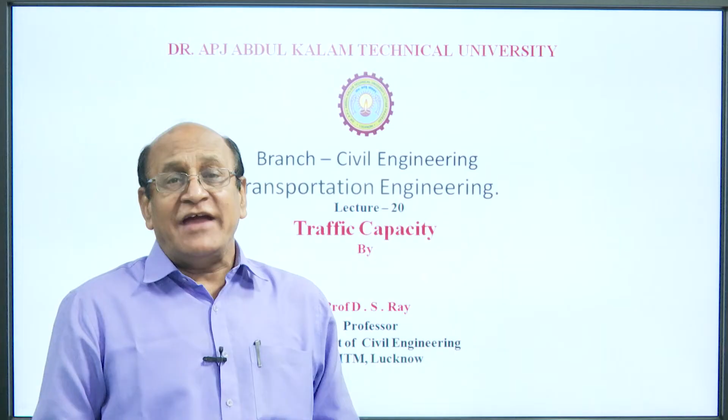Today, we will discuss the chapter of traffic engineering, that is traffic capacity. Before going to start traffic capacity, a few words have been left in previous lectures, so I will cover them in just 1 or 2 minutes.

Today's contents are accident and records, collision diagram, accident investigation and study, traffic capacity, theoretical maximum capacity, density, fundamental diagram of traffic flow, factors affecting practical capacity, traffic control devices, traffic signs.

In accident and records, collection of accident data is essential, in which first of all general data are collected. What is the date, what is the month, what is the weather in which the accident occurred. Next is location, what is the location of the area where the accident occurred. Details of the vehicle involved in the accident, which type, make, type of vehicles, this has to be collected.

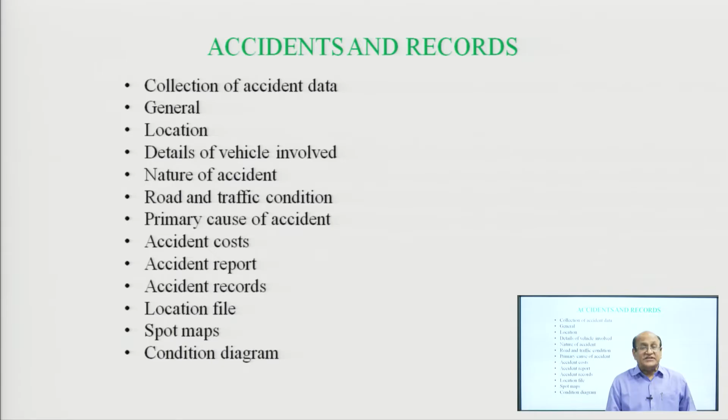Nature of accident, whether it is a major accident, minor accident, or some fatality has occurred, or someone is just injured. Road and traffic conditions. Road conditions are also recorded, the riding quality, whether riding quality is okay or not. The traffic condition, whether the traffic is mixed traffic, channelized traffic, unchannelized traffic. Next is primary cause of accident, in first instance, what is the cause of the accident.

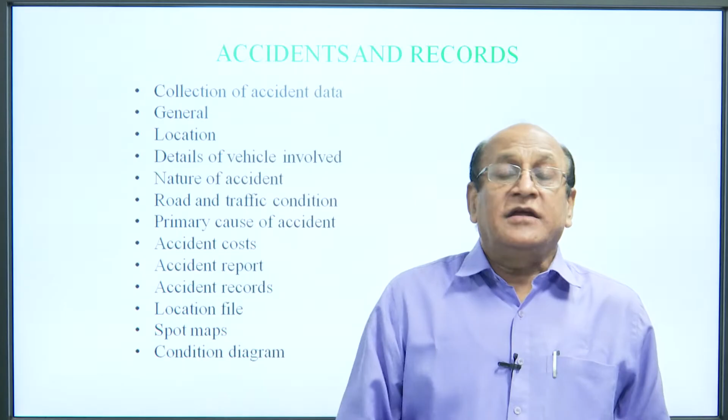Accident cost, what is the loss of property in this accident, this should also be counted. Accident report, the competent authority about the accident is police personnel. They have to work under the legal offence, so they should be informed. Accident records, these have to be collected by the civil personnel as well as the police personnel.

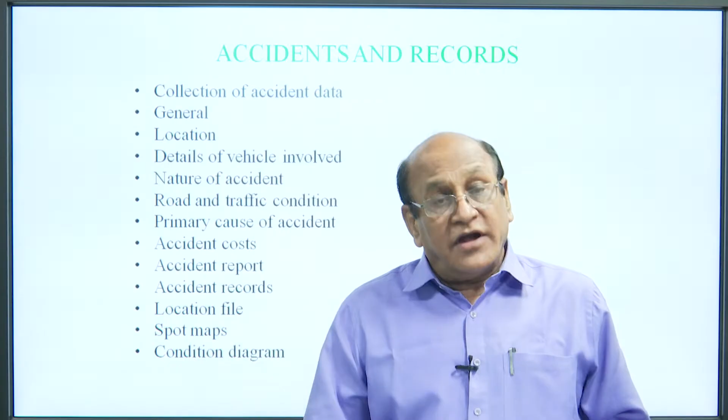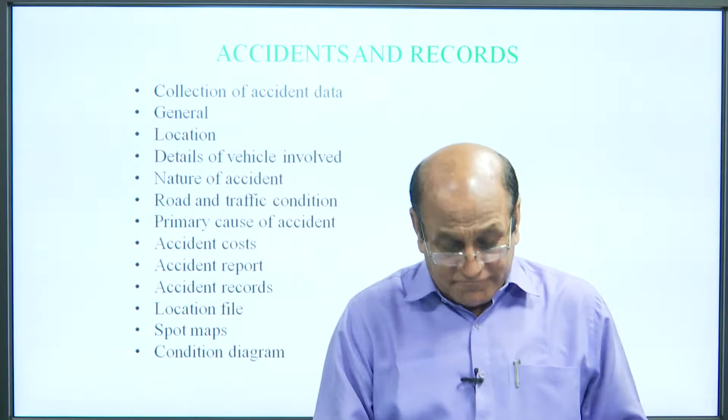Location file, what is the location of the accident? This should be mentioned in a file in a proper way. Spot maps, that is called Nazri Naksha. This should be recorded into the record book. Condition diagram, what are the conditions of that day, that time of accident, that should be recorded.

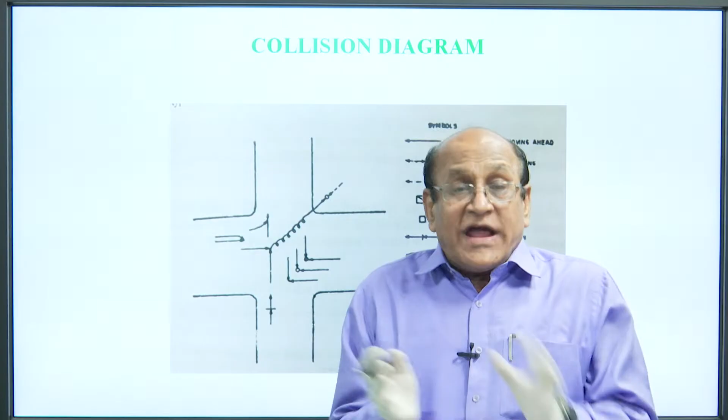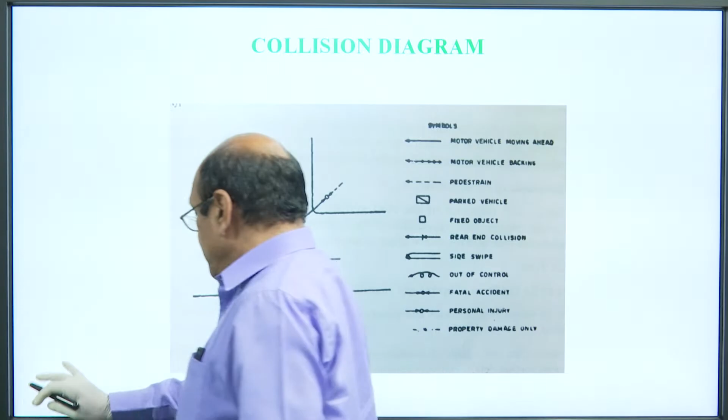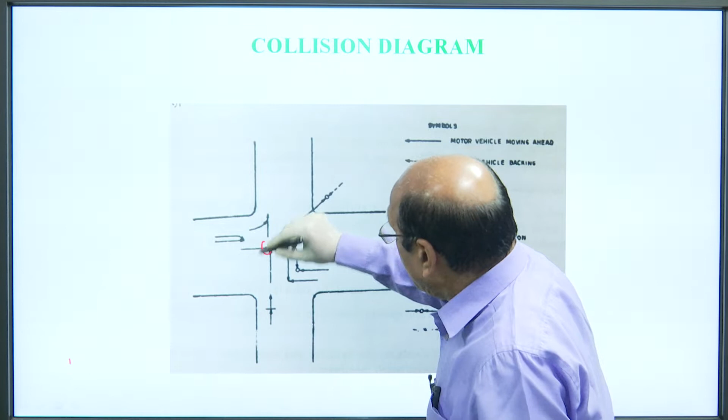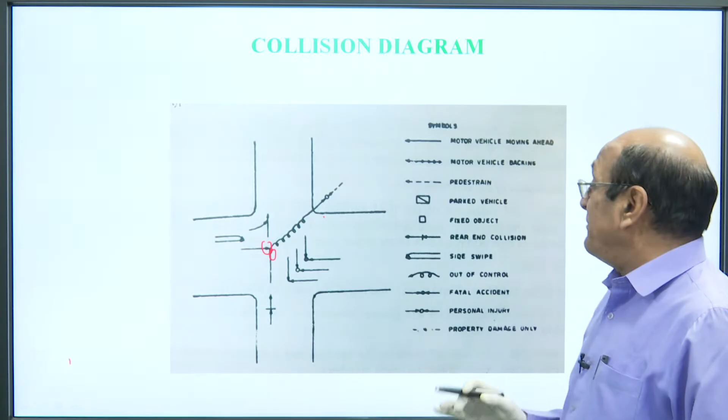This is the collision diagram, means when the vehicle and a pedestrian collide with each other, what is the position of the vehicle, what is the position of the pedestrian. This should be mentioned in a diagram. Suppose this is the vehicle and this fellow is a pedestrian. Both vehicle and the pedestrian have collided at this spot. So, this should be represented in the diagram.

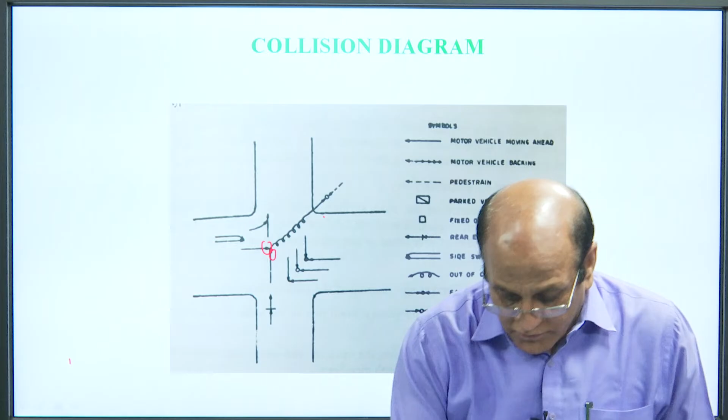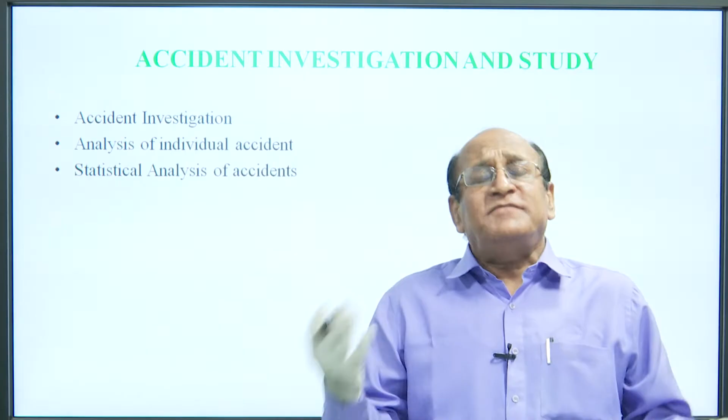Accident investigation and study. This has to be carried out after the accident. Accident investigation could be carried out by the police personnel, tests could be carried out on the vehicles, the persons and more, and that is analyzed for the individual accident, so that it could be compared with other accidents, whether the point of accident is causing accidents or something else. A statistical analysis of accidents should be kept in traffic engineering for future works.

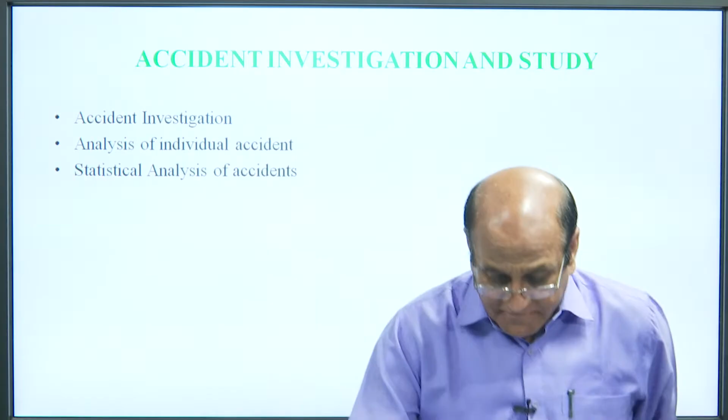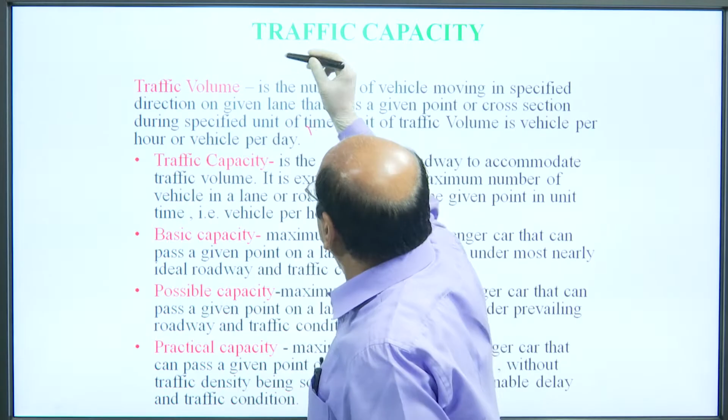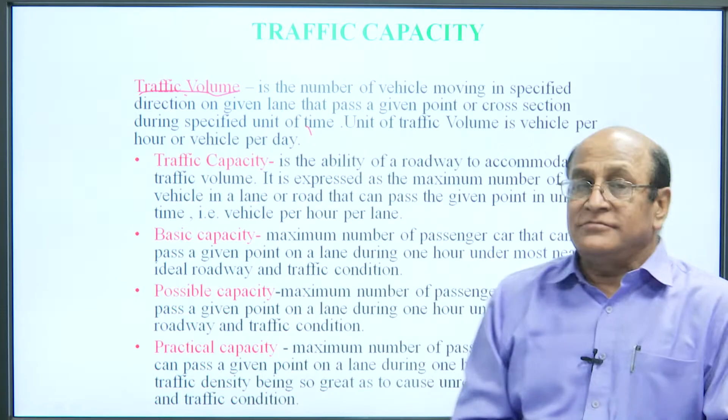Now, come to traffic volume and traffic capacity. First of all, in traffic capacity, the word coming is traffic volume. Traffic volume is the number of vehicles moving in a specified direction on a given lane that pass a given point or cross section during a specified time. Unit of traffic volume is vehicles per hour or vehicles per day. So, this is the traffic volume.

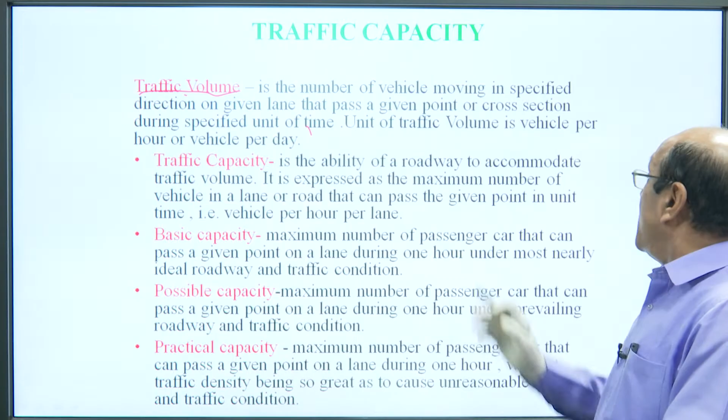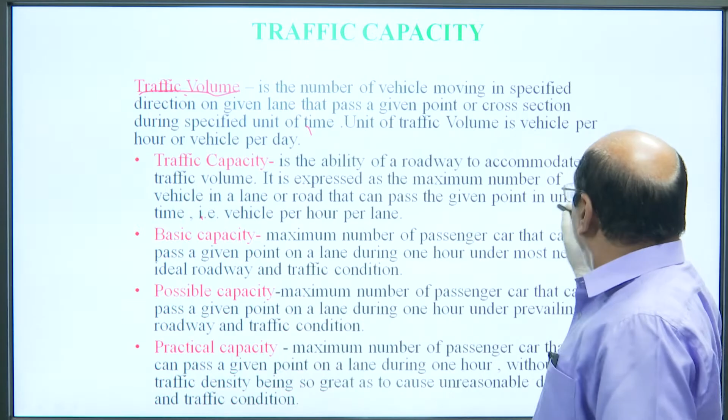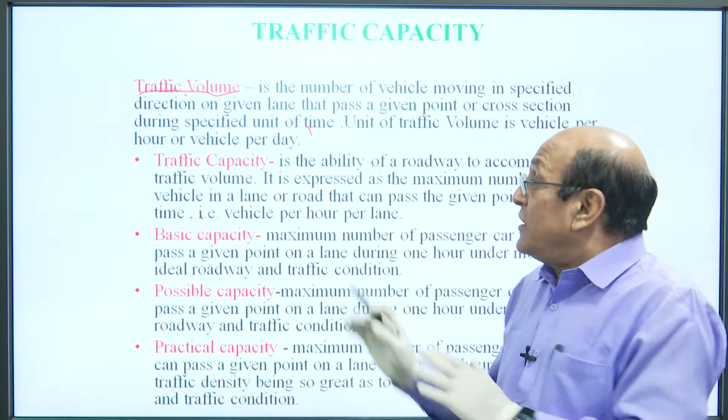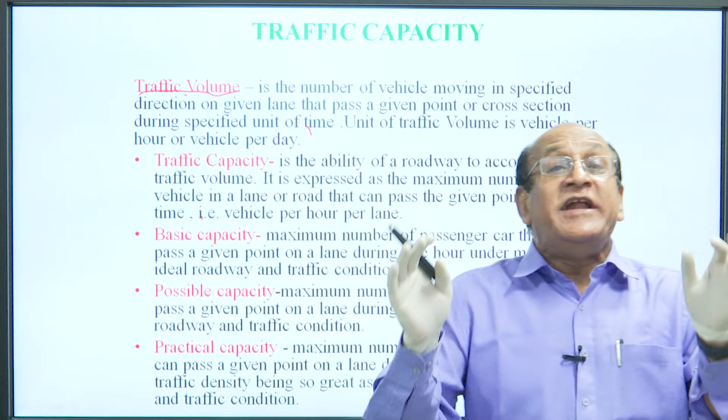Now, traffic capacity. Traffic capacity is defined as the ability of a roadway to accommodate traffic volume. It is expressed as maximum number of vehicles in a lane or road that can pass the given point in a unit time, that is vehicles per hour per lane. See here, traffic volume is the number of vehicles passing through a point or cross section, and the traffic capacity is the maximum number, means after that the road has no capacity to accommodate any further traffic. The traffic volume may be lower than the traffic capacity.

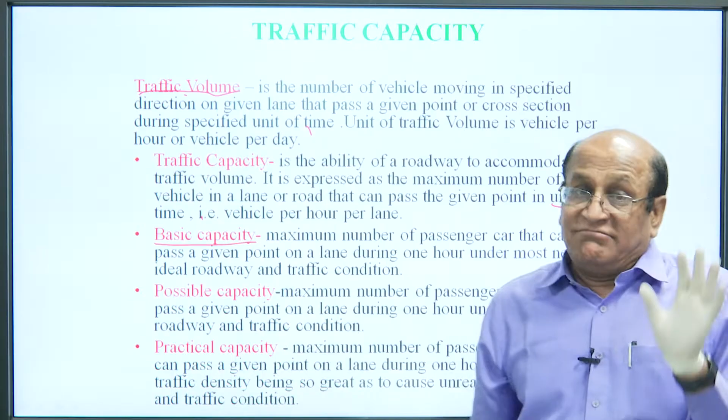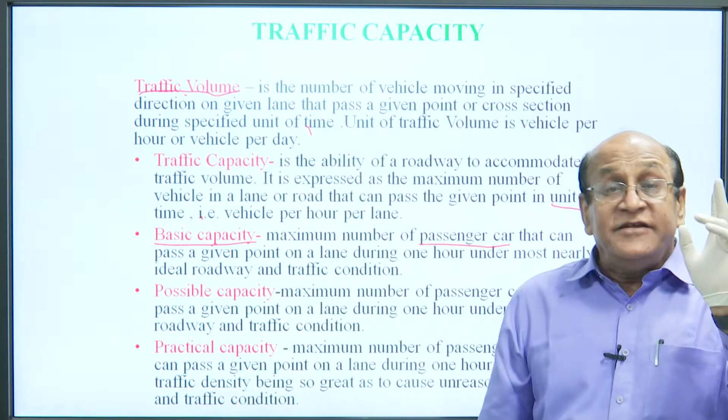Now, come to the basic capacity. Basic capacity is the maximum number of passenger cars. See here, it is not written vehicle, here passenger car. The maximum number of passenger cars that can pass a given point on a lane during 1 hour under the most nearly ideal roadway and traffic conditions. So, the basic capacity is the ideal capacity of a highway.

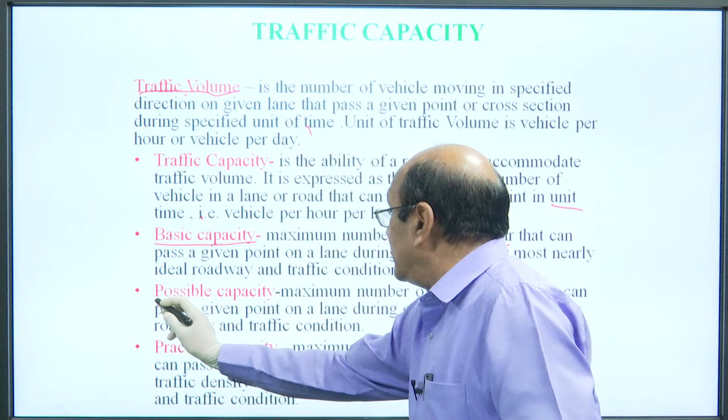Possible capacity, the maximum number of passenger cars that can pass a given point on a lane during 1 hour under the prevailing roadway and traffic conditions. So, this is the possible capacity.

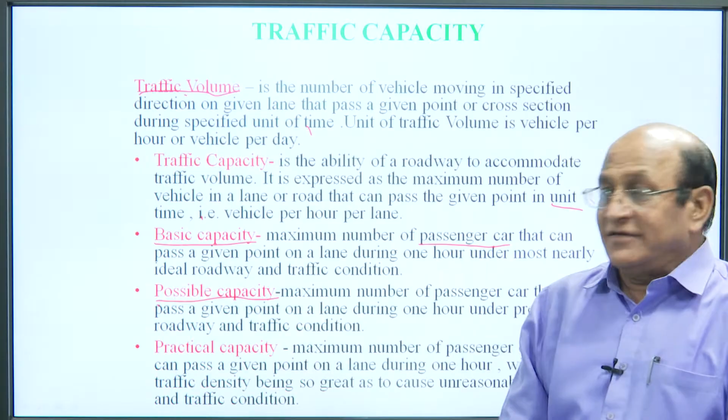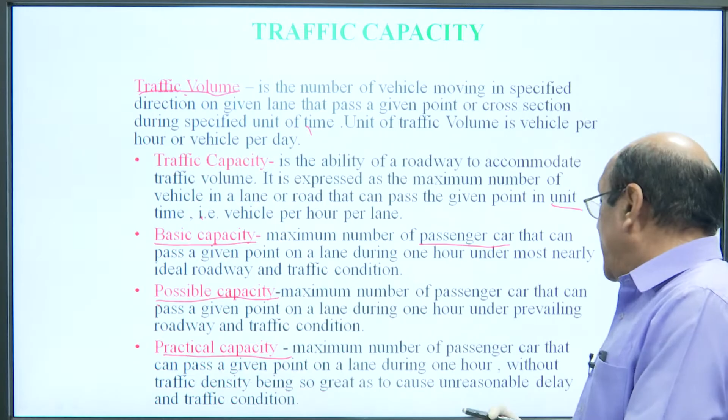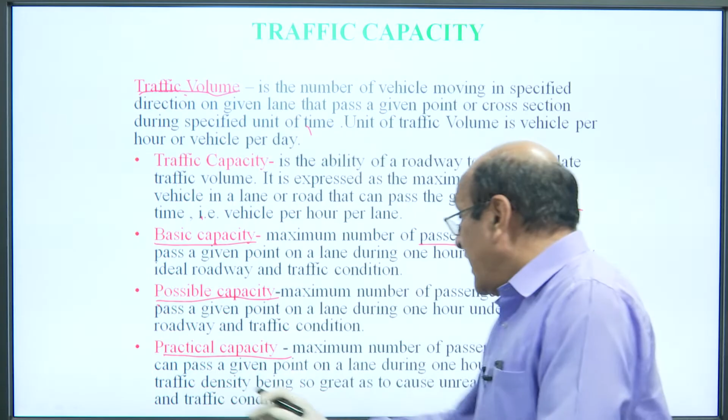Here you see, this is the possible capacity. Now, practical capacity: the maximum number of passenger cars that can pass a given point on a lane during 1 hour without traffic density being so great as to cause unreasonable delay and traffic conditions. So, these are the basic parameters as far as traffic capacity is concerned.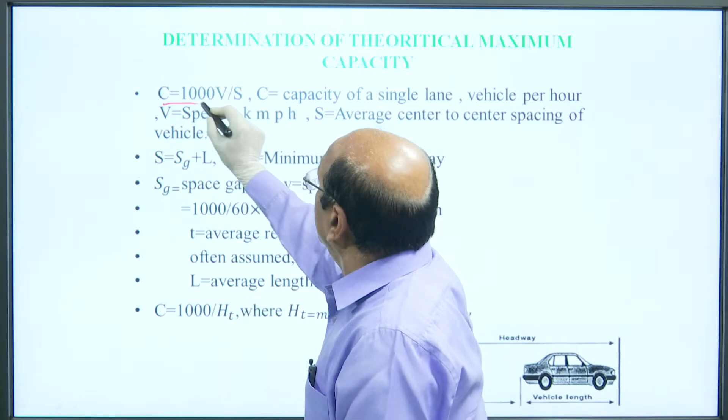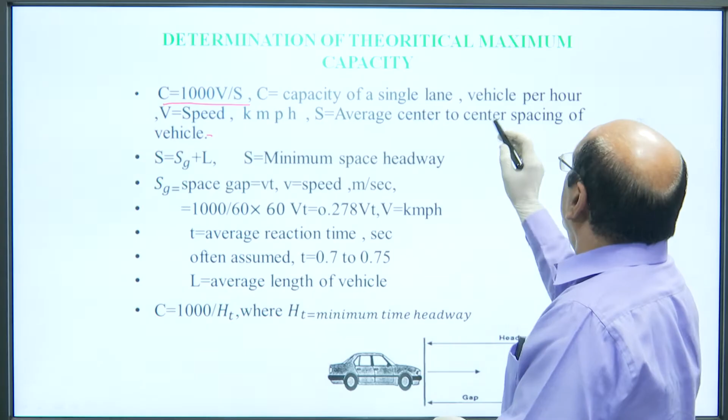Now, come to determination of the theoretical maximum capacity. That could be found out by C = 1000V/S, where C is the capacity of a single lane in vehicles per hour, V is the speed in kilometers per hour, and S is the average center to center spacing of the vehicles.

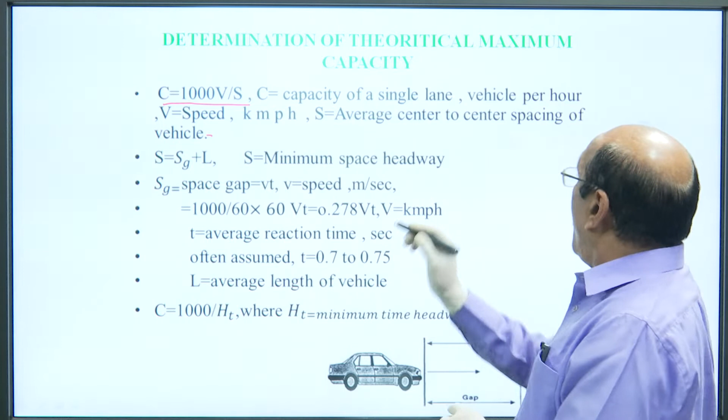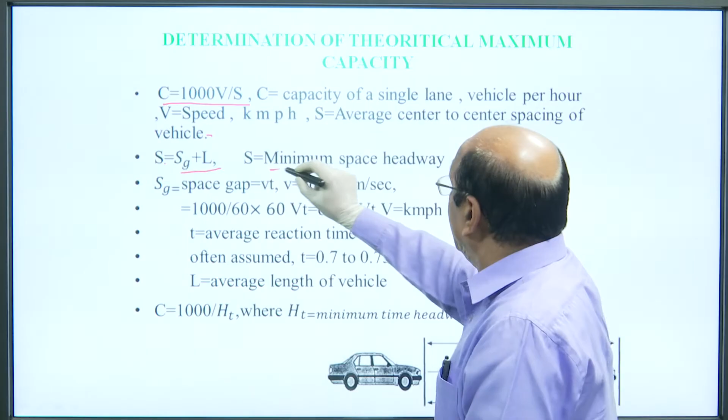So, here S = Sg + L. S is the minimum space headway, Sg is the space gap, and that is Vt. V is the speed in meters per second, means speed of the vehicle. So, this could be written as 1000 into V t divided by 60 into 60, so it will be 0.278 Vt, where V is in kilometers per hour. T is the average reaction time in seconds.

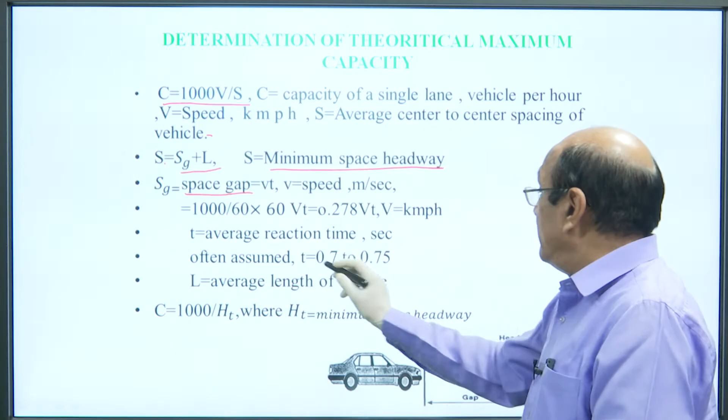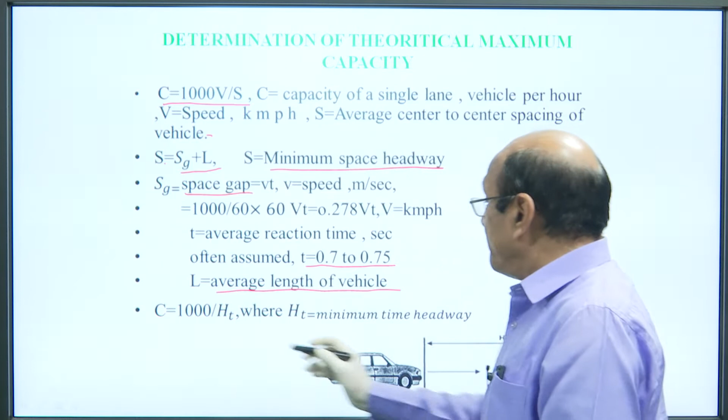Often it is assumed that T is between 0.7 to 0.75, depending on the age group of the person. L is the average length of the vehicle. So, C will be 1000/Ht, where Ht is the minimum time headway; here it was a space headway.

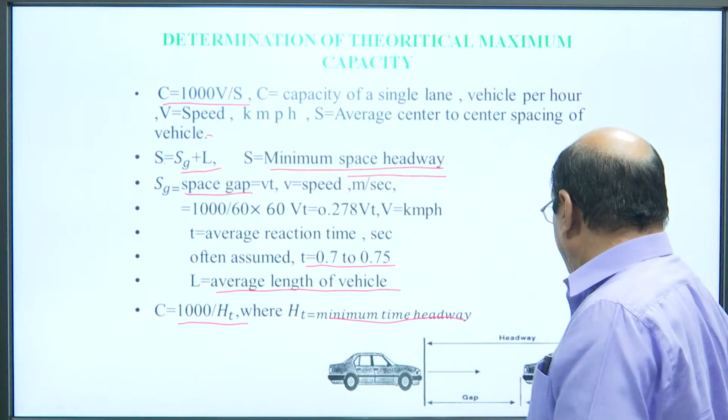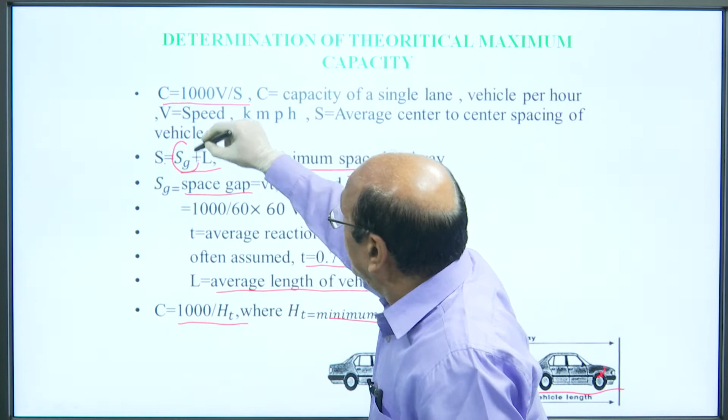So, see here, this is one vehicle, ahead this is another vehicle, this is the length of the vehicle, and between these two vehicles there is a gap, and this gap is Sg. So, S will be equal to Sg + L. L is the length of the vehicle.

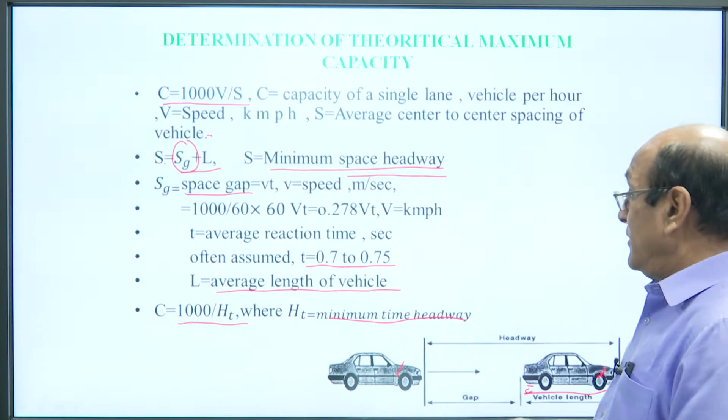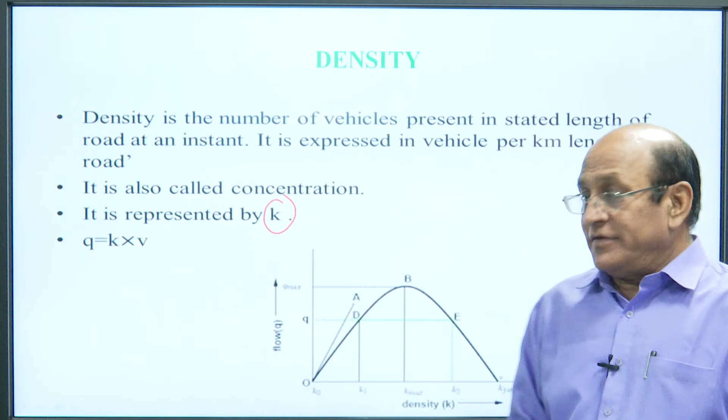Now, density. Density is the number of vehicles present in a stated length of road at an instant. It is expressed in vehicles per kilometer length of road. It is also called concentration. It is represented by K. So, this is the diagram between flow and density, and this flow and density diagram is parabolic. See here, this is the flow and this is the density. Density means concentration.

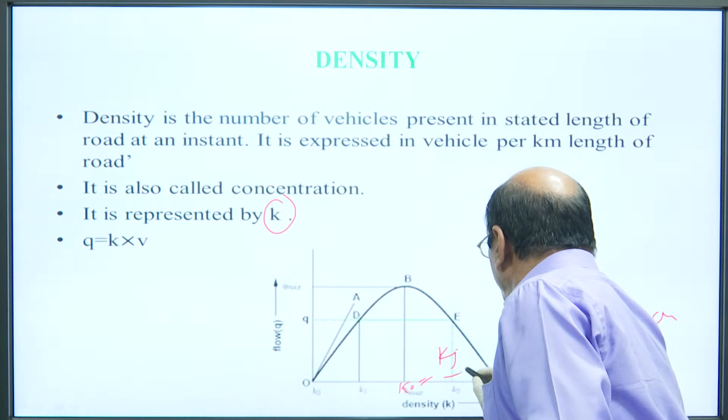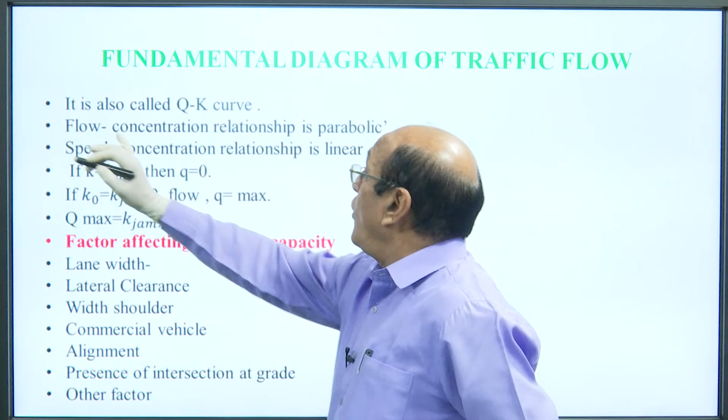When there is a jam, this is the maximum concentration, so it is called jamming concentration. This is K0, which will be equal to Kj/2. The fundamental diagram of traffic flow is also called the Q-K curve, where the flow concentration relationship is parabolic. Parabolic means y = ax².

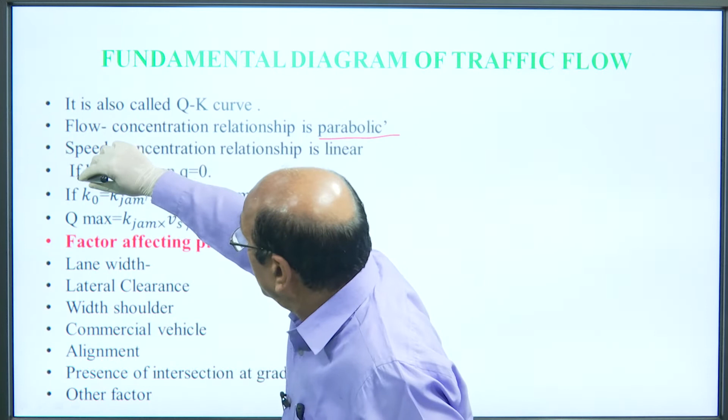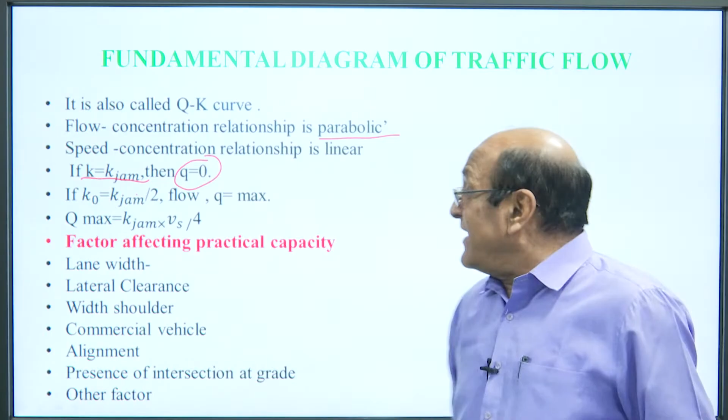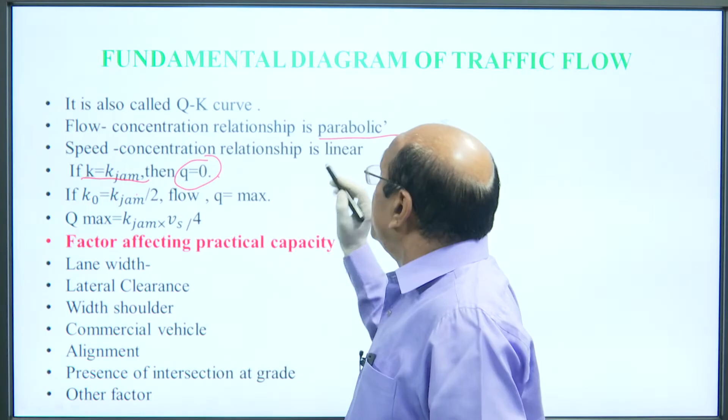If K is equal to K jam, then Q will be 0. If the concentration is maximum, means jamming concentration, there is no movement of vehicles at all on the highway; in that case Q will be 0. If K0 = K jam/2, flow Q will be the maximum. So, Q maximum will be equal to K jam into Vs, means free flow speed, divided by 4. That will give the maximum flow at those conditions.

Factors affecting practical capacity: lane width. If the lane width is reduced from 3.5 to 3, then the capacity is reduced to 76%. Likewise, lateral clearance: if lateral clearance from the edge of the road is 1.85 meters, then there will be no effect at all. But if the lateral clearance is less than 1.85 meters, that will affect the capacity of the highways.

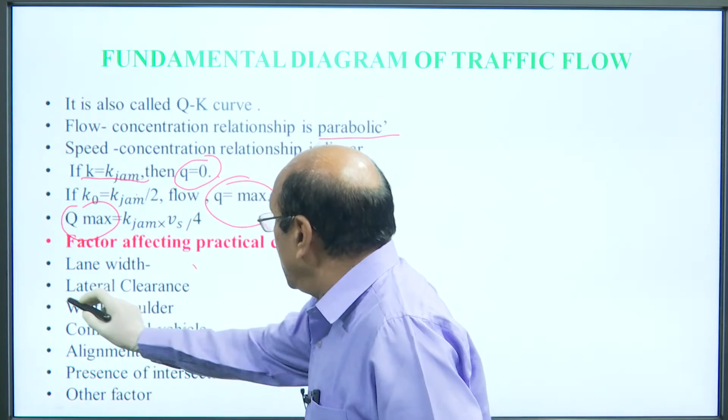Width of the shoulder. If the width of the shoulder is proper, then the capacity will increase automatically. This is a psychological factor. When a driver is driving a vehicle, he can pull his vehicle to the edge of the carriageway, because he knows that there is a proper shoulder. So, the capacity of the road will automatically increase.

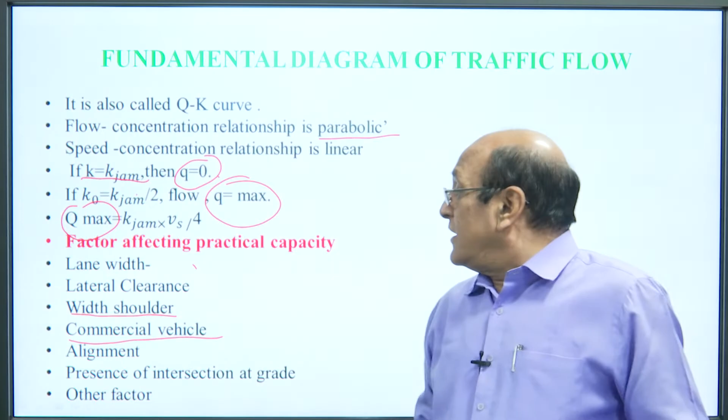Commercial vehicles. The speed and movement of commercial vehicles is such that it affects the practical capacity. Alignment. If the alignment is straight, then the capacity will increase. If the alignment is in a curve, then automatically the speed of vehicles on that highway will decrease, and finally decrease the capacity.

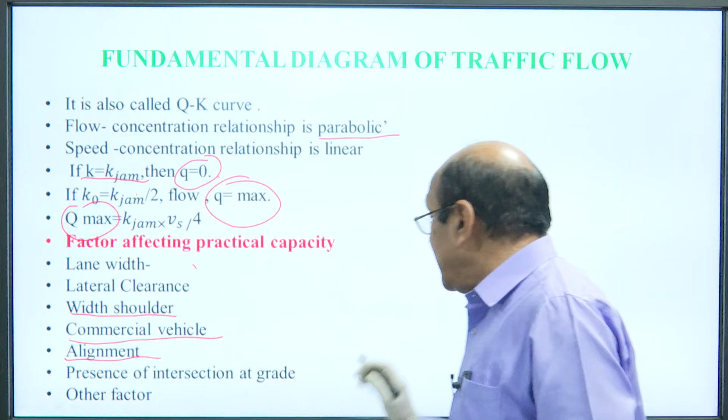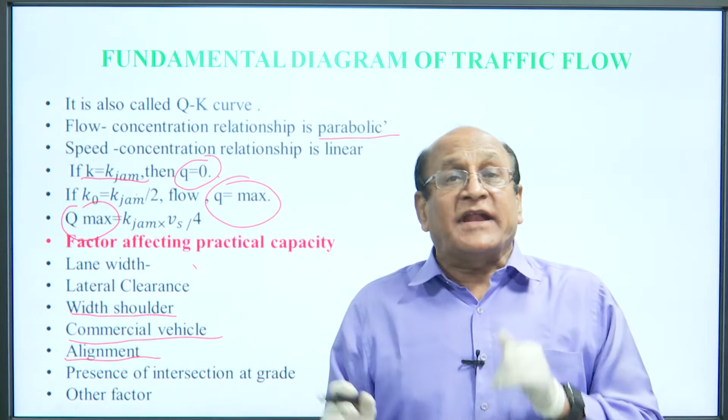The presence of intersections at grade. If there is an intersection at grade, of course, psychologically and physically the speed of the vehicle will reduce. Just see whether there is a passage for the vehicle at that cross section or not. So, this will also affect the practical capacity. Other factors, like climatic conditions, also affect the practical capacity of the highway.

Now, come to traffic control devices. These are used to control, regulate and guide the traffic. This is a very useful part of the highway. These are categorized under signs, signals, markings and islands. Traffic signs are used to regulate traffic by imparting messages to the driver about their need. This should be backed by law in order to make them useful and effective.

This is the provision in the Motor Vehicle Act. If there is any violation, that will be a legal offence and action could be taken by the police personnel if anyone is violating the law.

The principle is that traffic signs should be installed only by the authority of law, with proper enforcement measures, and put up only after sufficient traffic study. Traffic study is a must before putting up any type of sign. Excessive use of signs should be avoided, otherwise the driver will only look at the signs and the mind of the driver will divert from driving to looking at the boards. So that should be avoided.

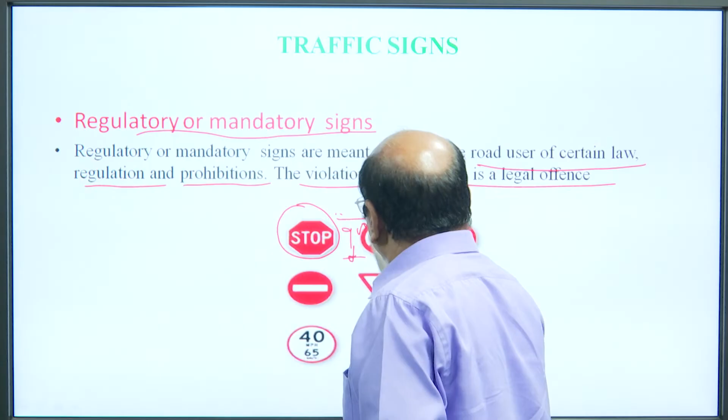See, the stop sign is the most important sign. It is an octagonal sign having a total width of 900 mm. The base of this plate is painted red and the border is white color, and 'STOP' is written on it.

Like other signboards, if the signage is triangular, that is also an equilateral triangle, then one of the arms is of 900 mm, painted white with a red border. If there is a circular sign, the diameter of the circular sign is 600, with white base and red border. So this is the regulatory or mandatory sign.

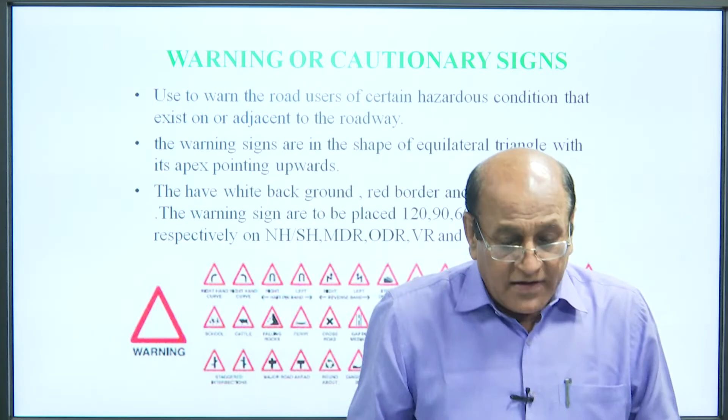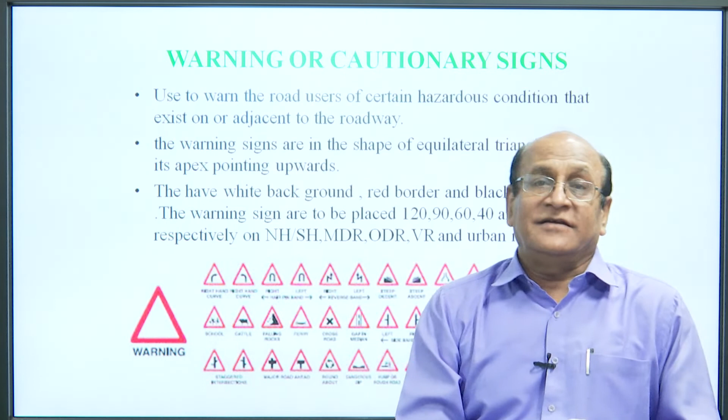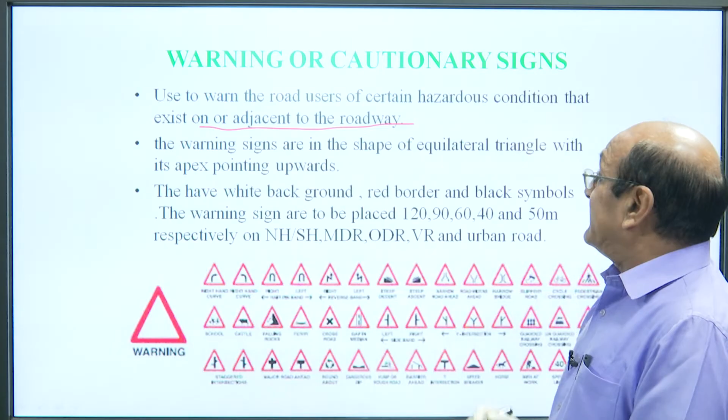Now, warning or cautionary sign. This is used to warn the road user of certain hazardous conditions that exist on or adjacent to the road. The warning signs are in the shape of an equilateral triangle.

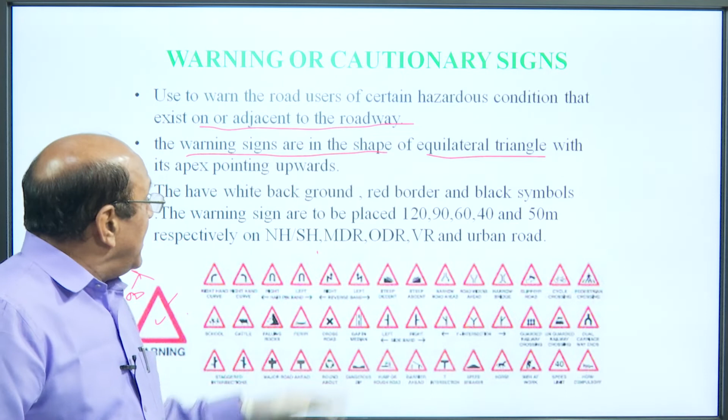Here is the signage, 900 mm, painted white color with a red border. They have white background, red border and black symbol. The warning signs are to be placed 120 meter, 90 meter, 60 meter, 40 meter and 50 meter respectively on national highway, state highway, MDR, ODR, village road and urban road.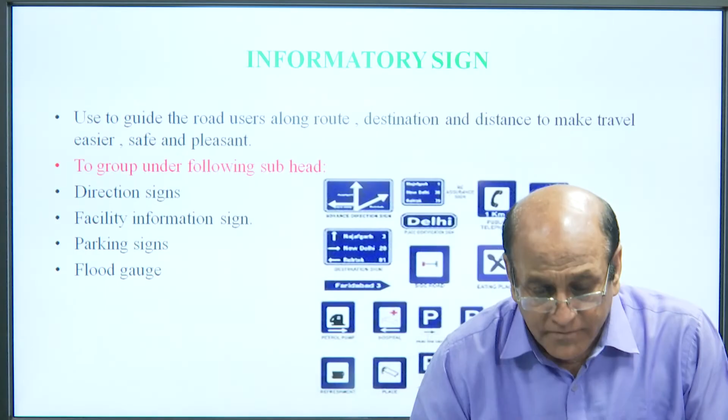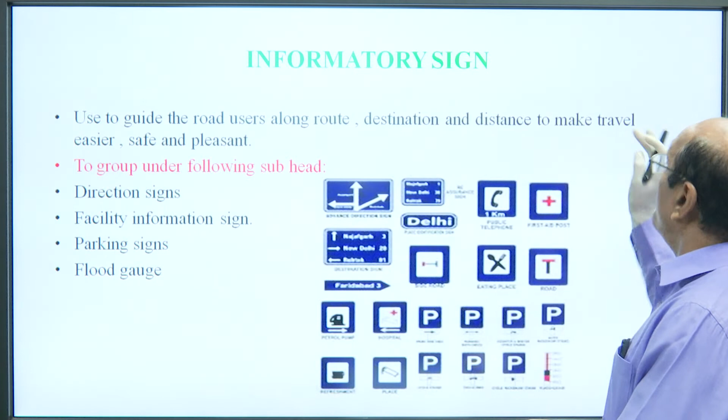Now, come to the informatory signboard. Informatory signboard is used to guide the road user along the route, destination and distance to make travel easier, safe and pleasant.

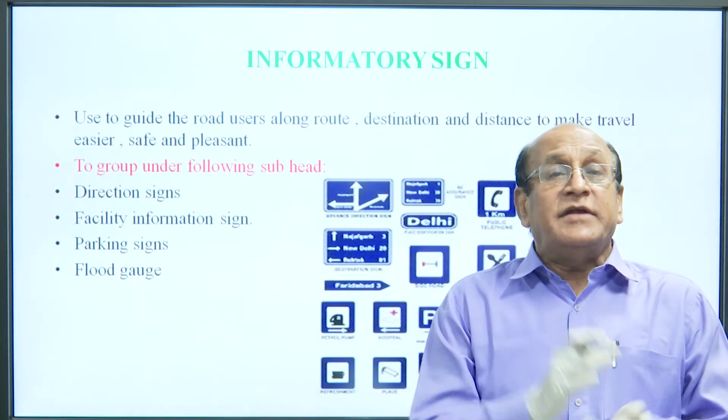Nowadays, roads are constructed with very high specification, speed of vehicles is even beyond 100 km per hour, and riding quality of the highway is too good. So the authority is now providing different utilities along the highway, so that the driver or passenger can easily know, say 10 kilometer, 20 kilometers, or 100 meter, 200 meter, that these facilities are available at such distance ahead.

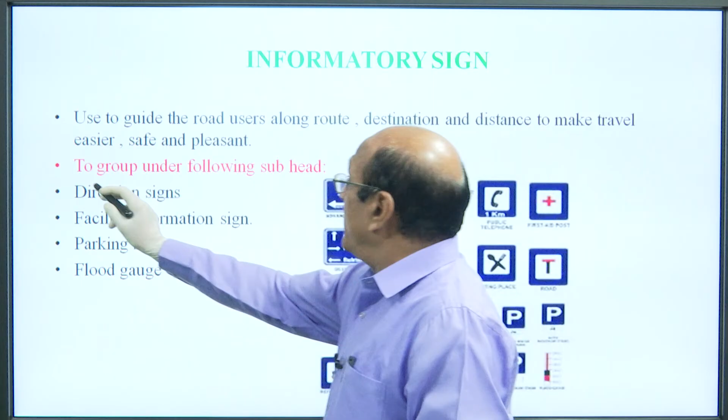So they are grouped under the following subheads. One is direction sign. When we go anywhere and if there is no direction, then we are not in a position to know where we are, because no direction signboard is placed there telling what is the direction, where I have to go.

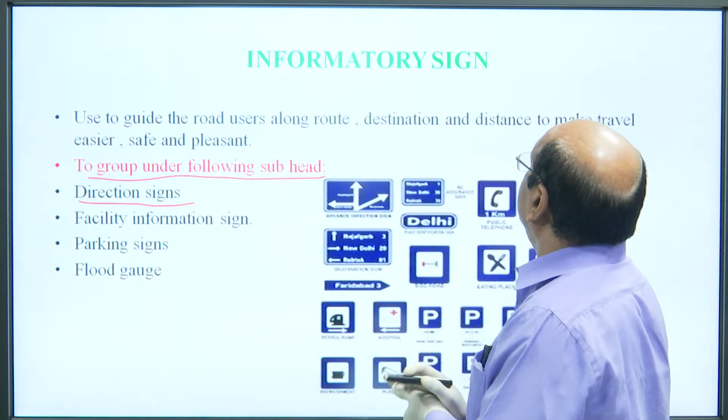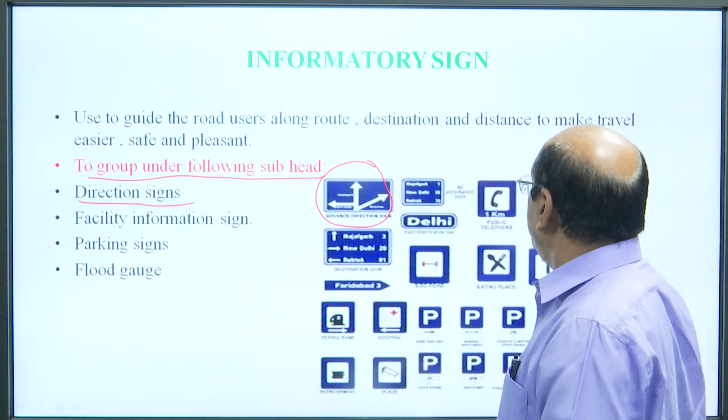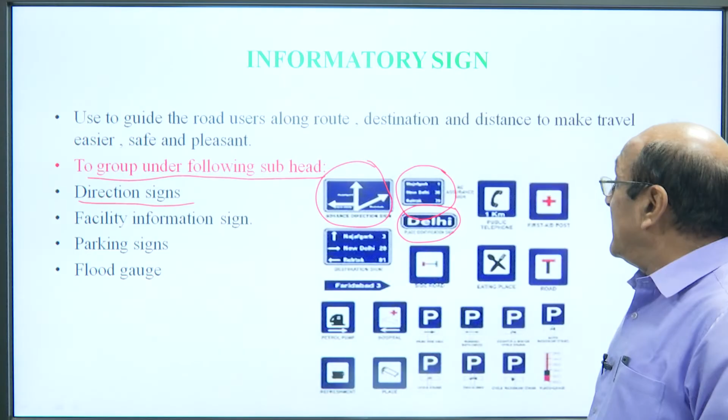Where there is no such problem, direction signboard is an informatory sign which is placed along the highway. Say this is the informatory signboard, say 'Delhi' — this is the informatory signboard, meaning direction sign. It shows this place is located from this place at such a distance.

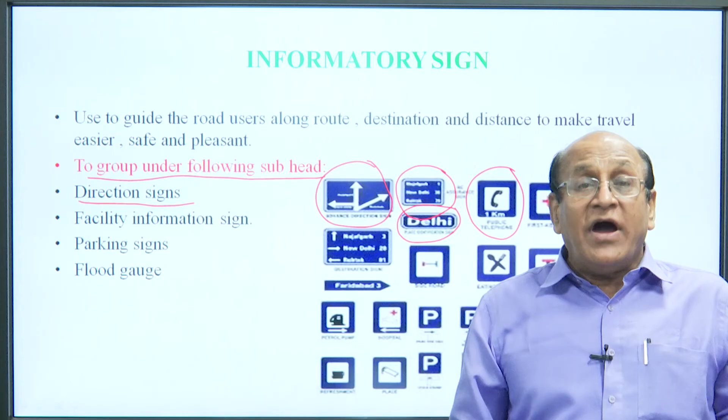Say this is one important thing — if you are going somewhere and you have no directions and your mobile is off, then how will you call anyone for help? So there should be a sign of telephone, so that one can at least inform the nearest person that this thing has happened on this road and the location is such and such.

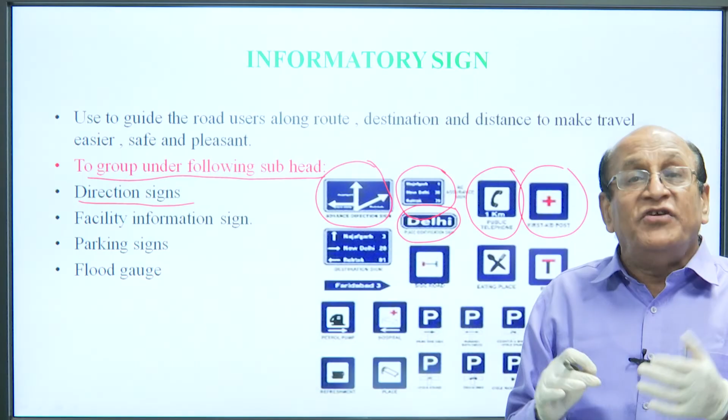Say something has happened, somebody has a medical problem, not only an accident — other causes which need a hospital or some first aid — then there should be some sign. There should be some sign which will help the passenger know that from that distance to that distance there is a hospital or first aid station where he will get some advantage or something extra which is highly needed at that time.

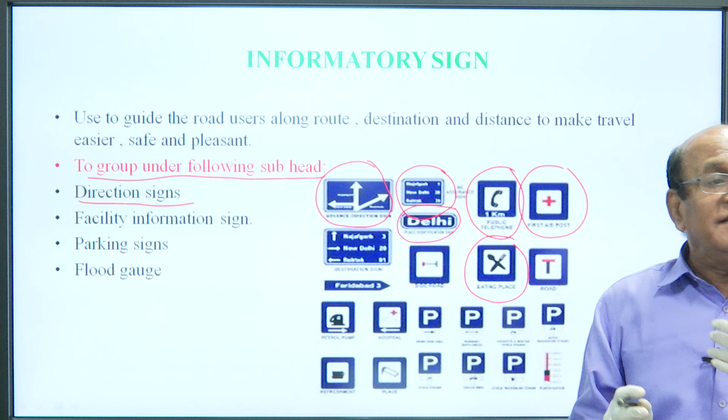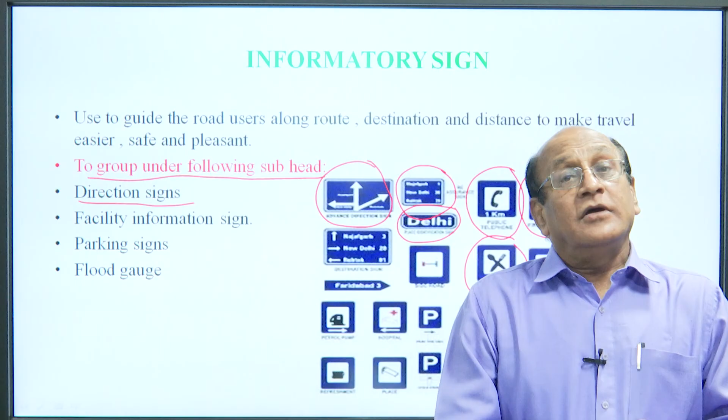Say this is the sign — if there is this sign, then anyone can take refreshment. So these are the informatory signs which are placed along the roads, so that drivers and road users could know about the things or facilities available on the road.